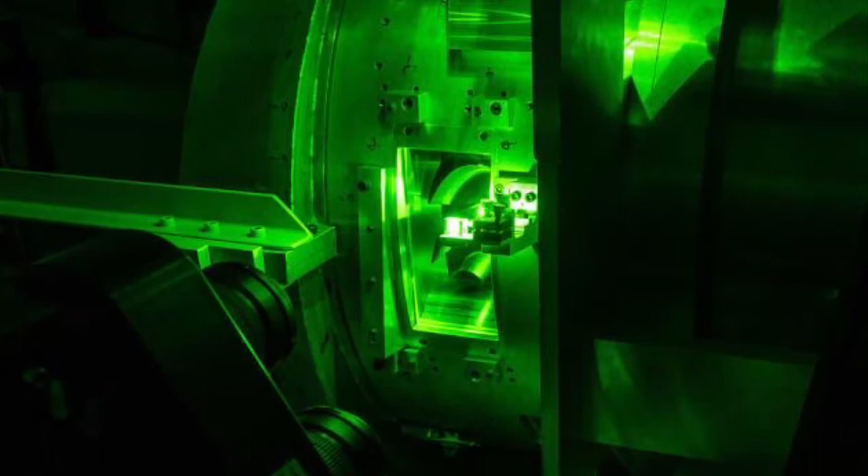At the University of Bath, the ELA, or Electric Light Aircraft team, have been designing solutions for the future of air travel since 2016. Some of our previous contributions have included an all-electric commuter aircraft with 9 seats, developing a strategy for generative design for additive manufacture, and volumetric analysis of propulsion unit egress mainstream interactions to improve efficiency.

In everything we do, sustainability comes first. Our entry into the Sustainable Aviation Competition takes a deep look into the future for aerospace vehicles, theorising how we can achieve zero-emission flight within the next decade. This is the future of propulsion.

The aviation industry is increasingly becoming a leading contributor to global warming. Whilst other sectors such as energy, farming and manufacturing are making steps to reduce their greenhouse gas emissions, air travel is currently lagging behind. The industry has set targets to achieve net zero emissions by 2050, but currently it is some way from accomplishing this.

In the last 5 years, battery electric vehicles have emerged as the focus of aviation's attempt to decarbonise. Rolls-Royce and Airbus have exhibited plans for their regional eFan-X in 2017, but this was later scrapped. Meanwhile, others have attempted to design larger electric aircraft or have made proposals for electrification of urban air mobility. But as of today, no electric aircraft operate commercially.

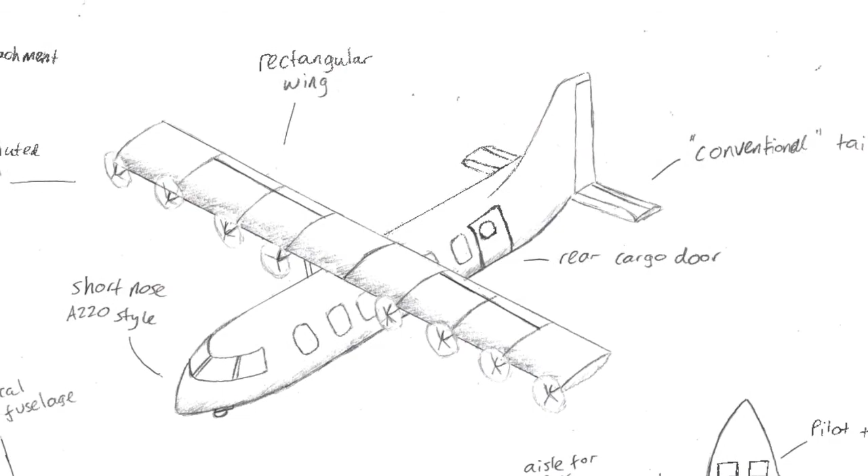As we have found in some of our previous design work, whilst all-electric aircraft can operate with zero emissions, their low energy density because of the batteries compared to traditional aircraft fuel means that they are inherently heavy, which severely limits the range that they can achieve. But what if the requirements to incorporate a heavy battery into aircraft could be mitigated by making other parts of the aircraft lighter? Individually, we have developed some concept ideas for methods which may be able to achieve this.

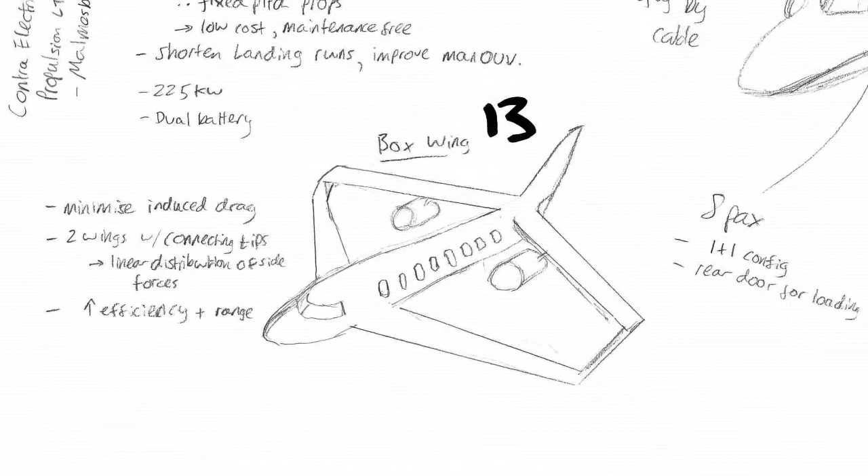While ideas such as lighter structural materials and more power-dense propulsion units are actively being considered by the industry today, our concepts envisioned a future where increasing the efficiency of the airframe would radically reduce the weight of the aircraft. Traditional tube and wing aircraft such as the Airbus A320 exhibit a maximum lift-to-drag ratio of around 18.

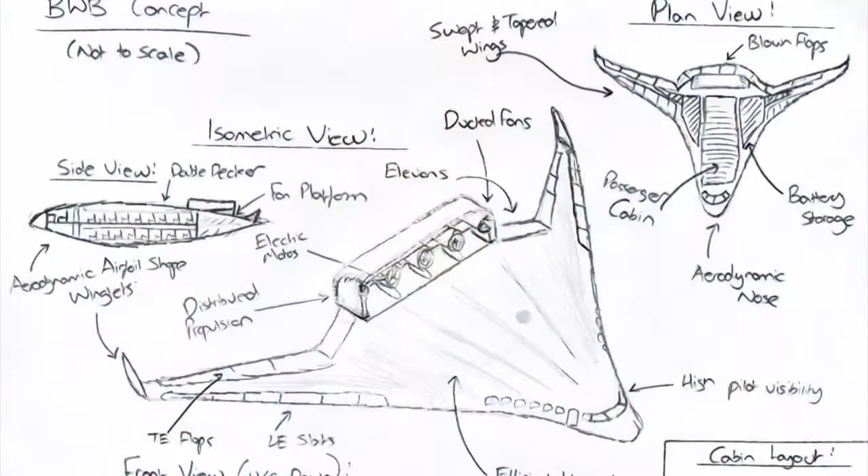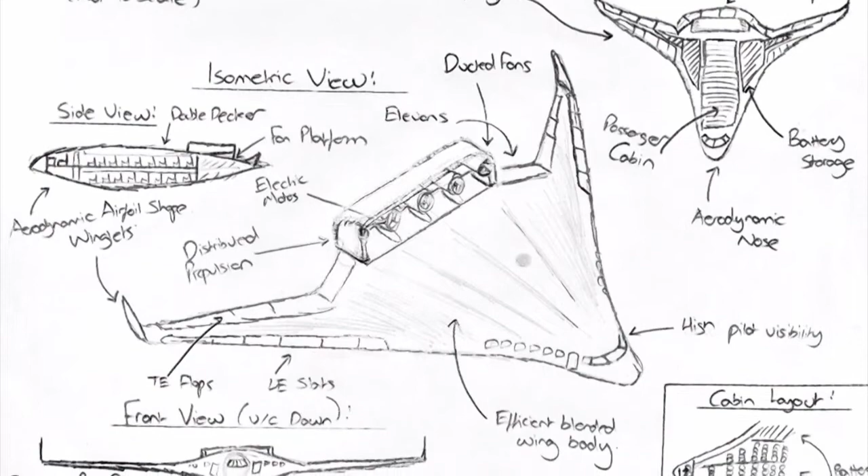Our most aerodynamically efficient concept, a blended wing body aircraft or BWB, would exhibit a lift-to-drag ratio of up to 25. Therefore, a BWB would provide a greater lifting capacity than similar-sized tube and wing aircraft, which could be used to carry a larger battery pack. This is the concept we decided to take forward.

During concept selection, we also disregarded ideas based on more radical zero-emission solutions like hydrogen or lighter-than-air technology, since the groundwork for battery electric flight has already been laid by the automotive industry and aerospace players in the last 5 years. We believe battery power is the future of propulsion.

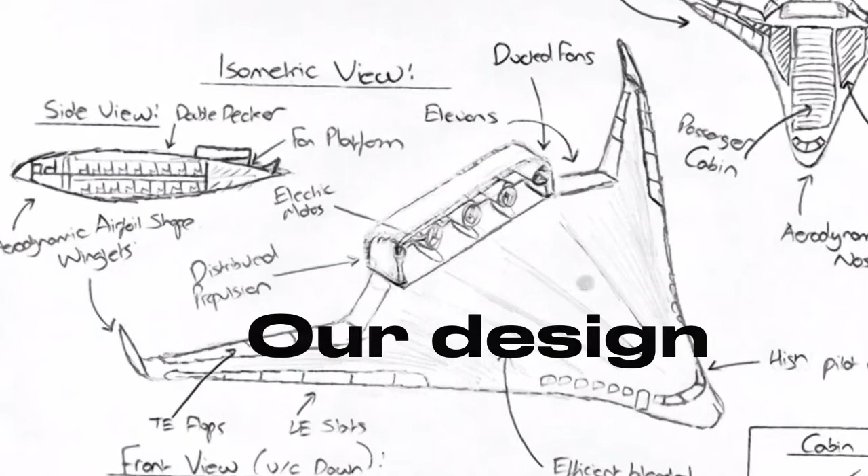From the concept designs, we decided to use distributed ducted fans for their high propulsive efficiency and effectiveness when integrated with a blended wing body design. This is due to their ability to provide a blown elevon effect, where the ducted fans act to re-energise the boundary layer at the elevons and enable greater aerodynamic performance. This is through allowing higher angles of attack before reaching the stall condition of the aerofoil, thus allowing for short takeoff and landing capability.

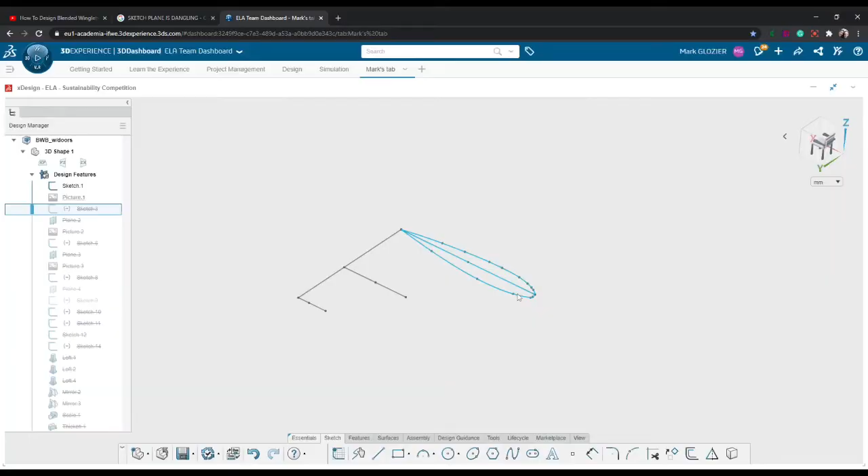To materialise the concepts into a CAD model, I used SolidWorks xDesign. I started by sketching the overall plan profile of the BWB and sketching aerofoil profiles to fit within this. NACA 23012 aerofoils were chosen from research as a suitable section for the BWB.

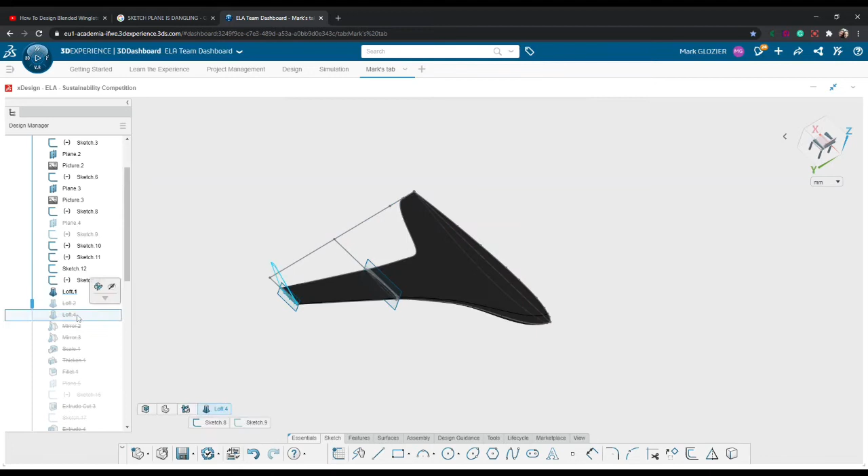The profile was imported into XDesign as an image and sketched over as a spline profile. These profiles were lofted with guide curves from the plan view to form the BWB and wingtips. The mounts for the ducted fans were then modelled through an extrusion and the fans assembled accordingly.

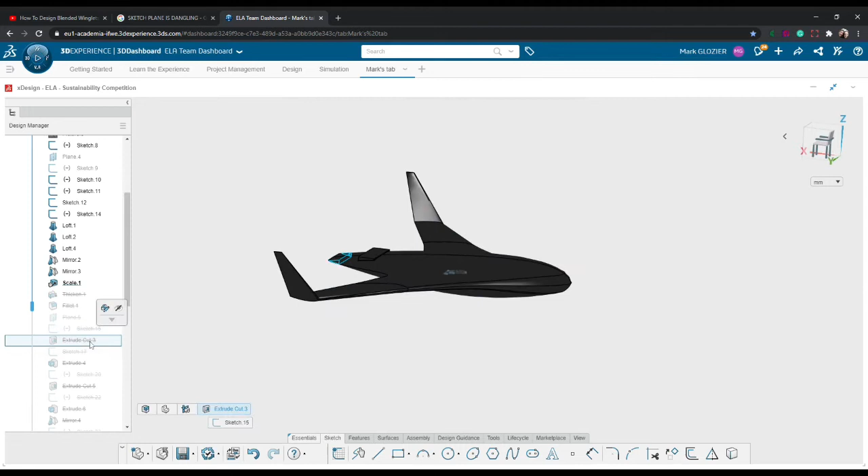Elevons were then modelled and assembled into the model upon performing extrusion cuts and modelling the shafts. The ducted fans themselves were modelled in xDesign and assembled within the ducted fan unit within CATIA.

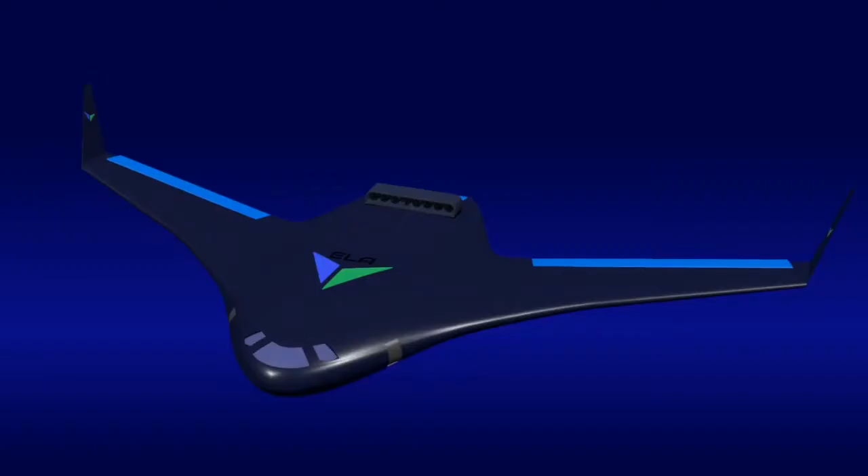This is our final aircraft design, featuring a frontal passenger cabin, ducted fans, wingtips and elevons. We created this render on the 3D Experience platform in CATIA Live Rendering, setting up lights and a camera path, and using it to add the ELA decal.

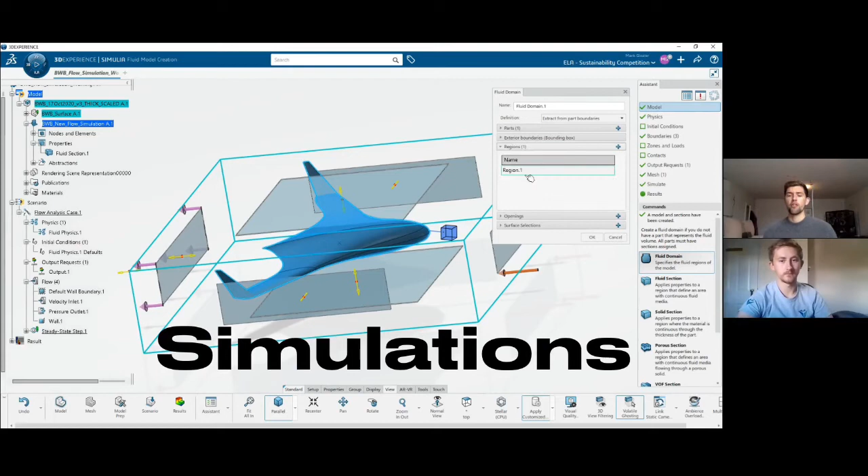The next step was to subject our designs to some validation simulations. We wanted to simulate the flow of fluid over the blended wing body to really show off the efficiency of the body. The first step was to import the model and then to assign the fluid region.

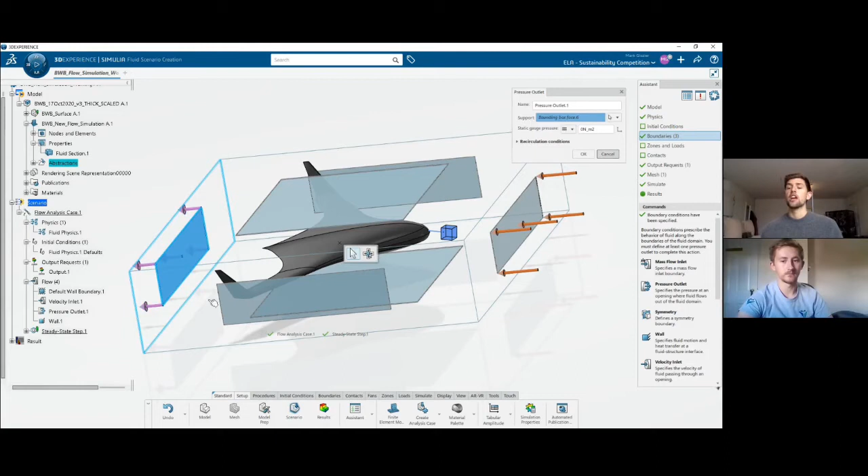We did this by creating a bounding box where the fluid would be and assigning the model as the fluid cavity. The next step was to assign our boundary and initial conditions. We set an inlet velocity condition and an outlet zero pressure condition, and also assigned the walls of the bounding box as the walls of the simulation with a slip condition.

The next step was to assign the fluid as air and to create our output requests. This would mean that the simulation would record the data we later wanted to use to create plots and figures. Before we could run an accurate simulation, we had to create a refined mesh.

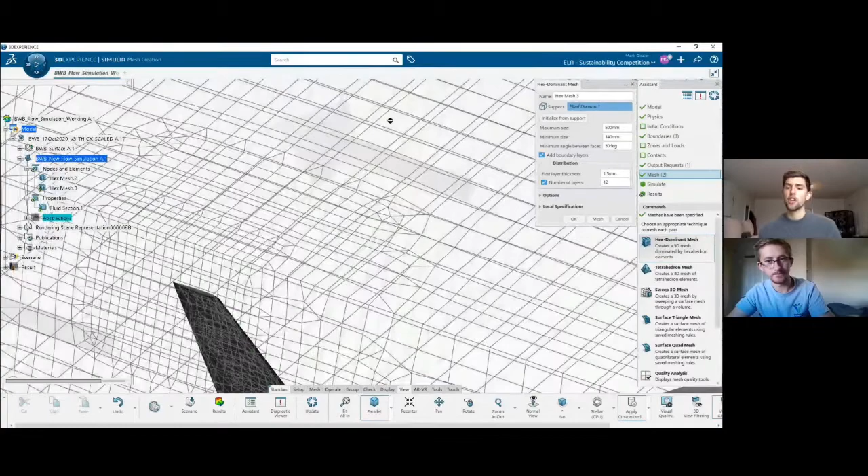We did this by using the hex dominant mesh settings within Simulia and also using the boundary layer conditions to make sure that we had refined mesh at the edges to show the change in the boundary layer state.

We obtained the velocity fields from the CFD simulations and analysed the flow field around the blended wing body at different sections across the wing.

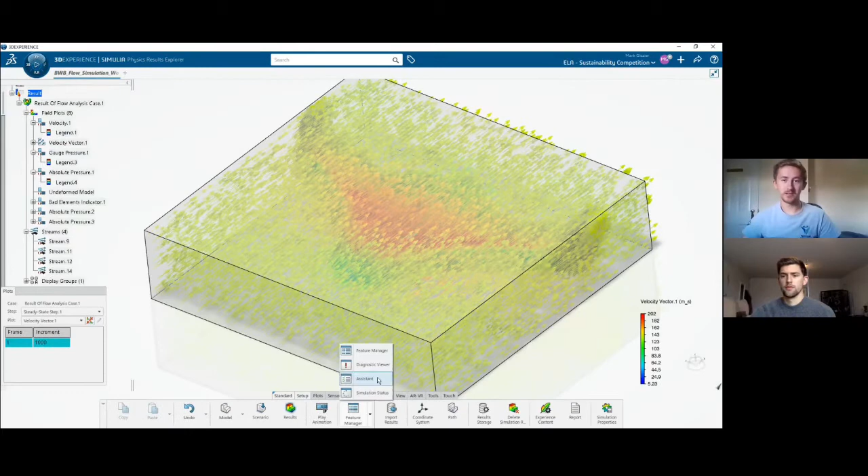By changing the domain to the blended wing body surface, we were able to obtain the general absolute pressure field across the blended wing body surface.

We analysed pressure contours at different spans across the blended wing body and extracted numerical values for the pressure across the aerofoil.

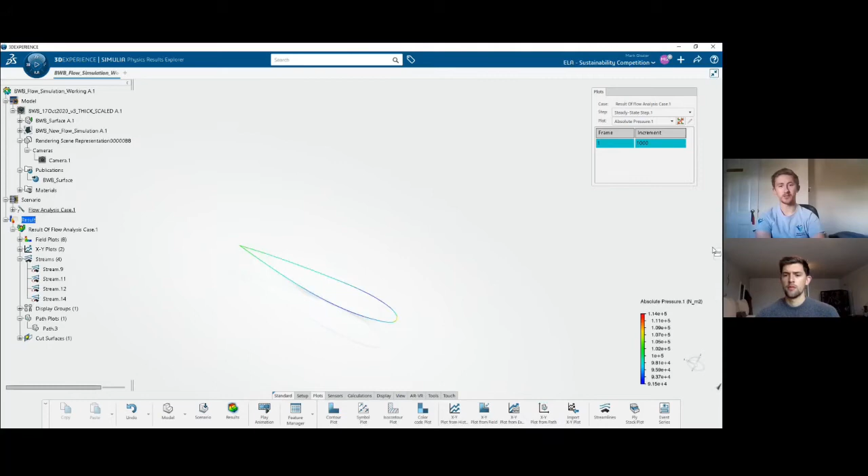We plotted an XY path across the section of the aerofoil to obtain the pressures on the suction and pressure side of the aerofoil. The next step was to add to the simulation by plotting velocity streamlines, and using the 3D Experience play button it was possible for us to easily animate the flow over the surface of the aircraft.

As you can see in this video, we decided to show off this feature using the side view, the top view and an isometric view to really give a feel of how the flow passes over the aircraft body and generates lift.

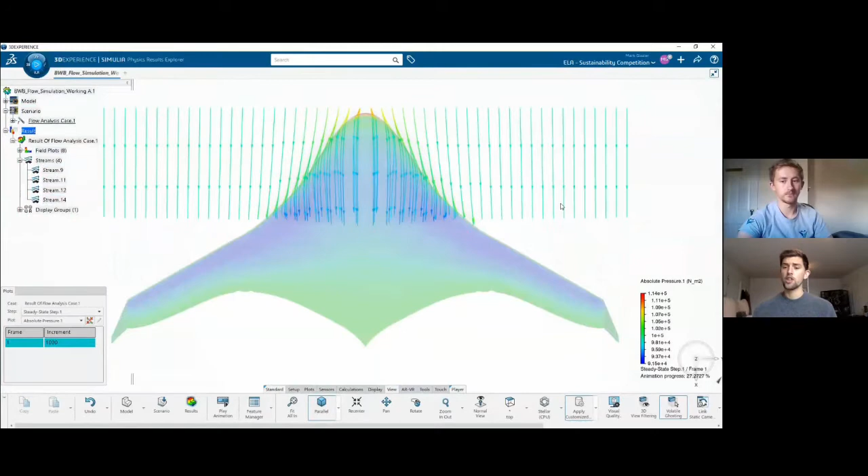From a historical XY plot of the different components of force, we obtained the drag and lift force as the solution came to convergence. These results, combined with those discussed previously, showed that the blended wing body wings and elevons must be mounted at a permanent angle in order to generate sufficient lift.

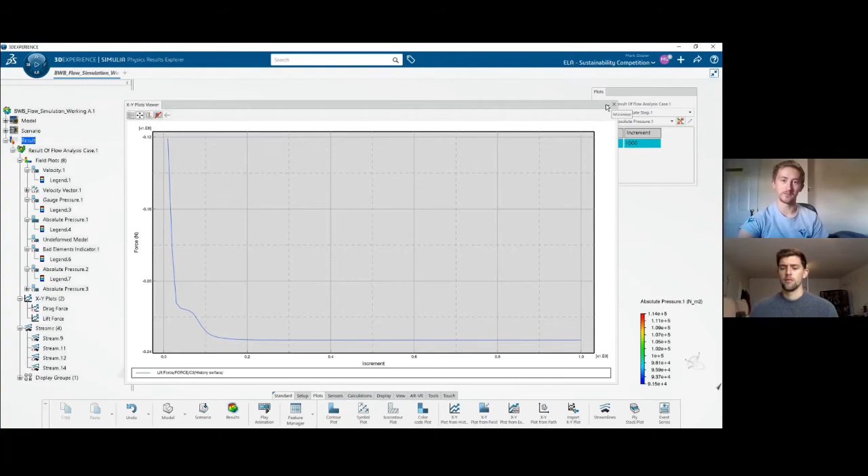Our initial calculations showed that despite the advancements of the BWB structure, the low energy density battery technology would still limit our aircraft to operating on shorter regional routes.

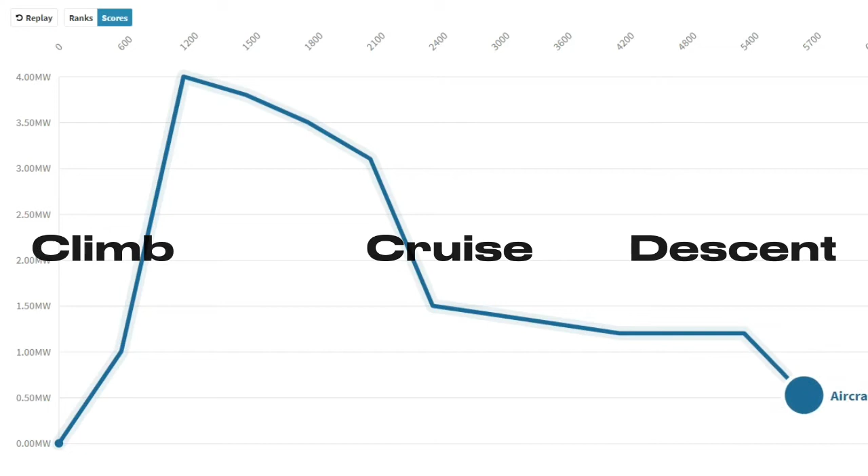In an attempt to improve range, we built an analytical model of the power requirements for a typical regional aircraft flight. This power profile helped us identify that the takeoff and climb phases require significantly more power than the rest of the flight.

In order to give battery-powered flight the leg up it needs to reach the range required to service profitable regional routes, we decided to incorporate a beamed power solution.

Beamed power refers to supplying power to the aircraft via electromagnetic radiation from a grounded source, reducing the need for the aircraft to carry its own stored energy in the form of batteries or fuel.

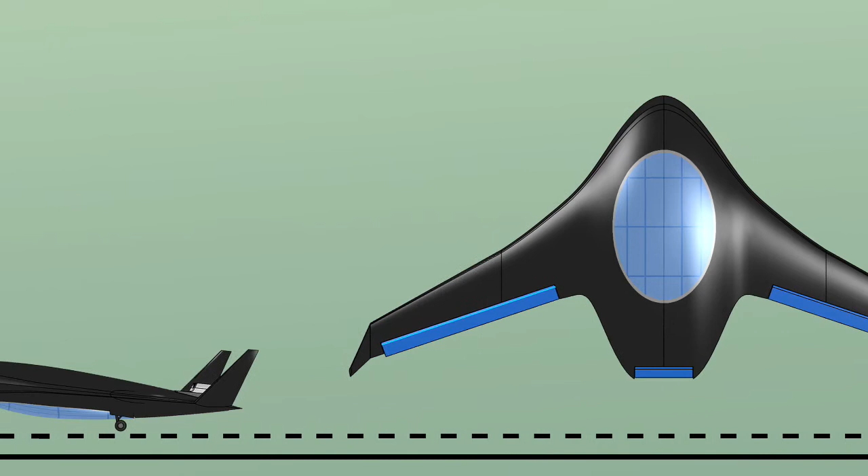While relying on beamed power for the whole flight would be unreasonable due to infrastructure requirements, providing beamed power during takeoff and climb phases would significantly increase the range of the aircraft by matching power drain during this time.

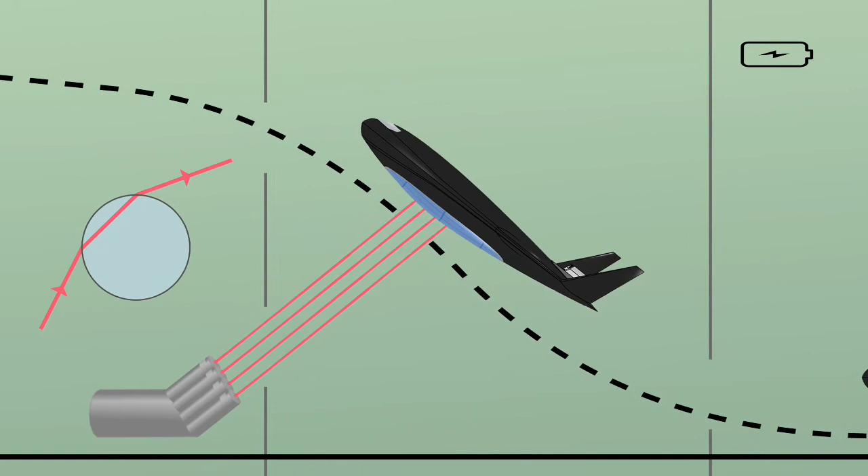A laser array would track photovoltaic cells on the underside of the aircraft, with a combination of laser and photovoltaic chemistry chosen to match wavelengths for maximum conversion efficiency.

A relatively brief time for the laser power transfer would mean that cooling would be a less serious issue than for an entirely laser-powered flight, as heat could be dissipated during the later phases of the flight.

This use of beamed power would help to improve the capabilities of battery-powered flight by reducing the reliance on battery energy density, which presently restricts electric aircraft to very short-range services.

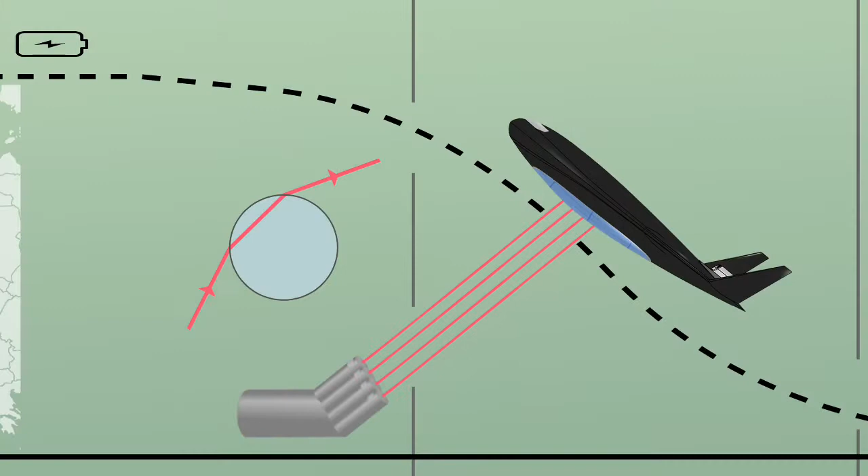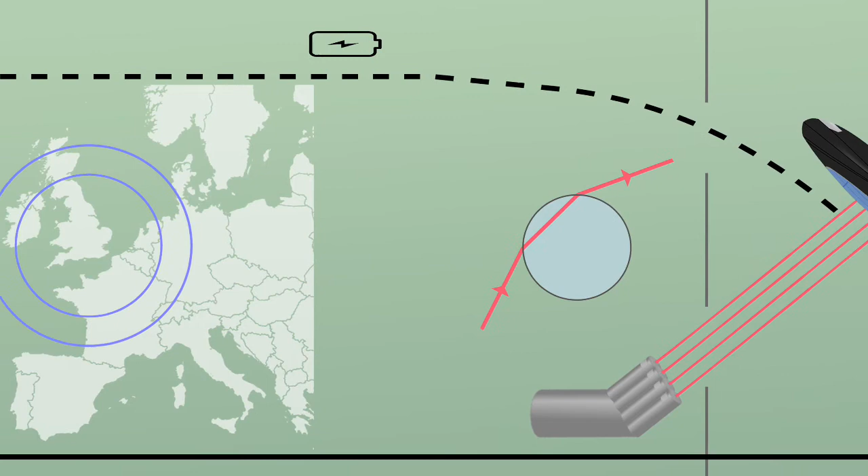With this improved range, electric aircraft could replace those reliant on fossil fuels, flying higher passenger numbers on regional flights, and do this earlier than would be possible relying solely on battery energy density improvements.

The management of our entry into the Sustainable Aviation competition was made simple and effective through use of the 3D Experience tools. We set up a project management tab on our team dashboard and used different apps to assist us in managing the project. Web Notes was useful for recording our meeting minutes from our daily morning and afternoon meetings on Discord. We were also able to record our goals for each day in these notes, so all team members knew what needed to be done next.

This tab also included a quick link to our collaborative space and a 3D drive which we used to share documents we put together on research in different areas, as well as sharing screen recordings for the final video presentation.

The most useful tool, however, was an ENOVIA project planner. We used this to build a Gantt chart of the tasks we needed to accomplish to deliver the project goals. It was especially useful to assign these tasks to each team member. We also assigned a priority and input dependencies for each of the tasks. We used the deliverables and attachments feature to easily navigate to the output from the task. The summary tab gave us a good overview of our progress throughout the project, while the task tab was useful as a current to-do list.

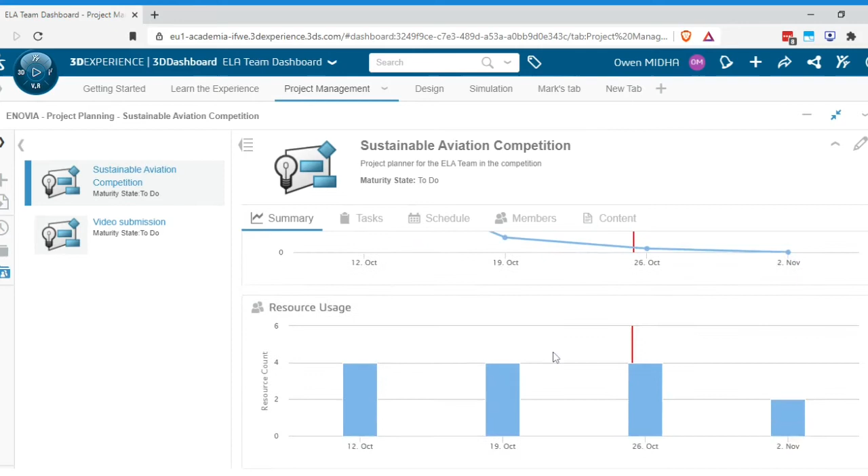When selecting materials to manufacture the aircraft, we wanted to achieve a lightweight solution with high strength, stiffness and damage tolerance, but also use materials that are inexpensive where possible. We considered the manufacturability, selecting suitable materials for parts that need to be 3D printed or machined.

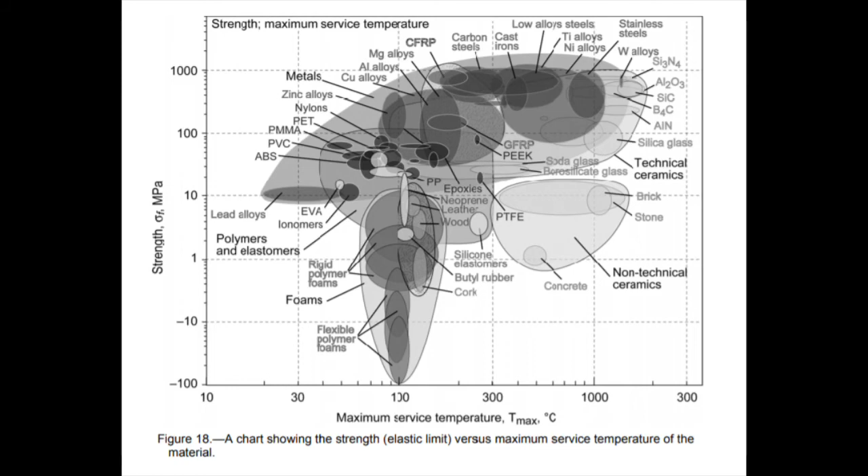Reviewing the properties of common aerospace materials such as aluminium alloys, titanium alloys, ceramics and hybrid composites, we decided on a carbon and glass fibre reinforced plastic structure to enable us to design for a high structural safety factor whilst minimising weight. For certain heat sensitive areas on the aircraft, particularly surrounding the PV cells, titanium alloys will be used due to their high heat resistance as shown by the attribute charts which we analysed.

Our aftermarket considerations will maximise the number of components that can either be reused, recycled, or remanufactured at the end of the aircraft's life. To be reused, all parts will need to be awarded a certificate of airworthiness, so it's therefore important that thorough maintenance is carried out throughout the aircraft's life to keep parts in prime working conditions.

Typically, a metallic aircraft component can be recycled by up to 90% of its mass. However, our aircraft will be built primarily with CFRP composites in order to minimise weight. Composite components can be difficult to recycle. There are several ways to recycle composites that we have been researching, though they are still developing and scaling up commercially. These include nitric acid treatment to dissolve the thermoset resins, and incineration processes.

Another sustainability challenge involved with our design is the end-of-life recycling of our batteries. One suggestion is to sell on degraded batteries to ground-based industries who can accept a lower energy density rating. To preserve the quality of our aircraft components throughout its life, we will repair components where possible using advanced manufacturing techniques, further improving its sustainability.

For example, directed energy deposition will be utilised to repair fan blades on the ducted fans if they become damaged during, for example, a bird strike. This is very important for our design given the increased number of fans in the distributed propulsion system.